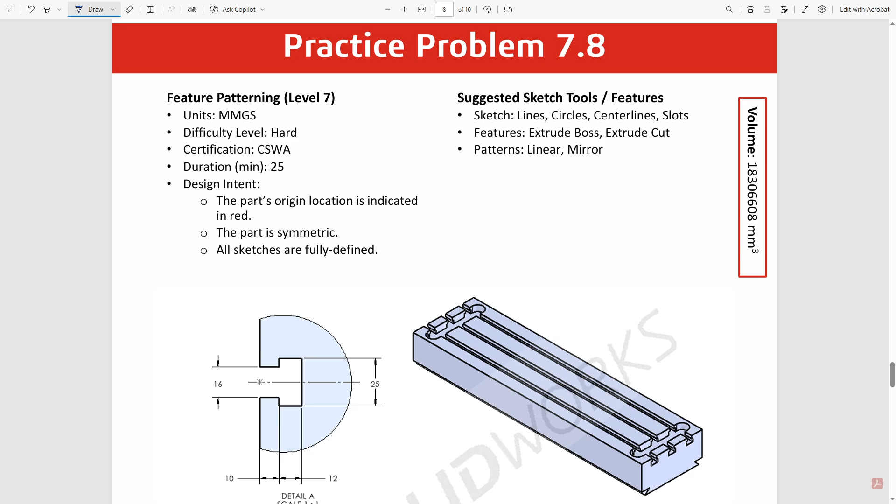I'm going to walk you through how I solved the CSWA practice problem 7.8. So for this problem, first I created the main rectangular prism and then started cutting things away, starting with these two little notches cut out, and then creating this little shape right here and cutting out its long track.

Then I used a linear pattern to create these two, and then finally created this slot right here, cut in a little bit, and then mirrored that feature to create the other cut for the other slot. So I'm going to start in the top plane and extrude down to create the rectangle. So let's get started here.

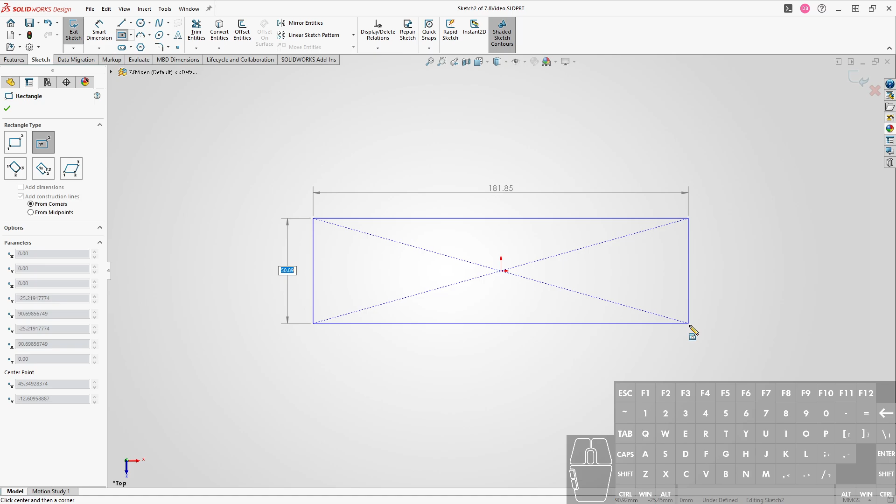So start in the top plane, and you can use Q for that. Top plane, sketch. Okay, and I'm going to use a center rectangle. Let me see here. So center rectangle with dimensions 225 and 850. And it's really big, so let me zoom out.

And as mentioned, we're going to extrude down, and the distance will be 90 plus 16 going down. The 90 plus 16 is coming from here and here, so that from the top to the bottom of that rectangular prism, it's going to be 106. Okay, so then we're going to work on these little notches right here and here.

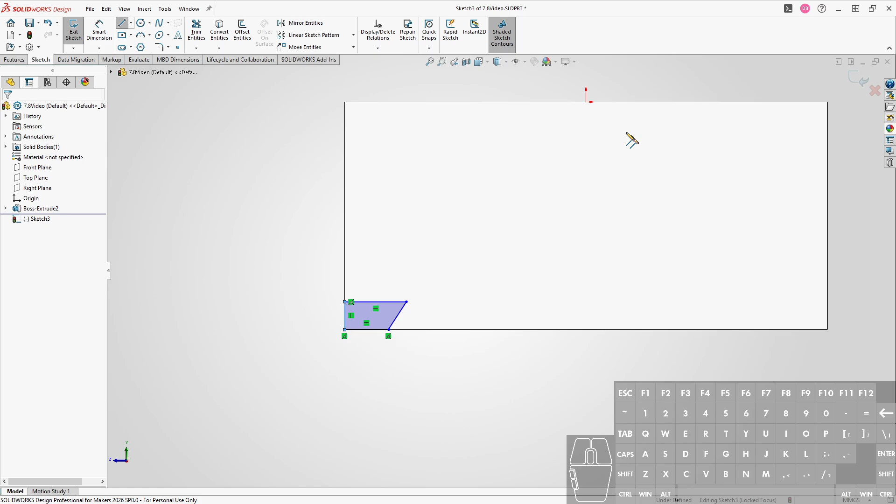So I'll create a sketch on this face, enter line mode, roughly do that little cutout profile. All right, and actually I'm going to create a center line for reference. We'll see why in just a moment. Okay, so it looks like the height of this little cutout is 16, and then this angle here is 45.

And then here's where we're going to have to use the center line. You can see that from the little tip right here to the other tip is 200. So if we dimension this tip, and then we can try to click on the center line, then that'll give you the distance from here to the center line, but if we move our mouse across the center line, it gives you the mirrored distance across. So we can click, hit enter 200, and there we go.

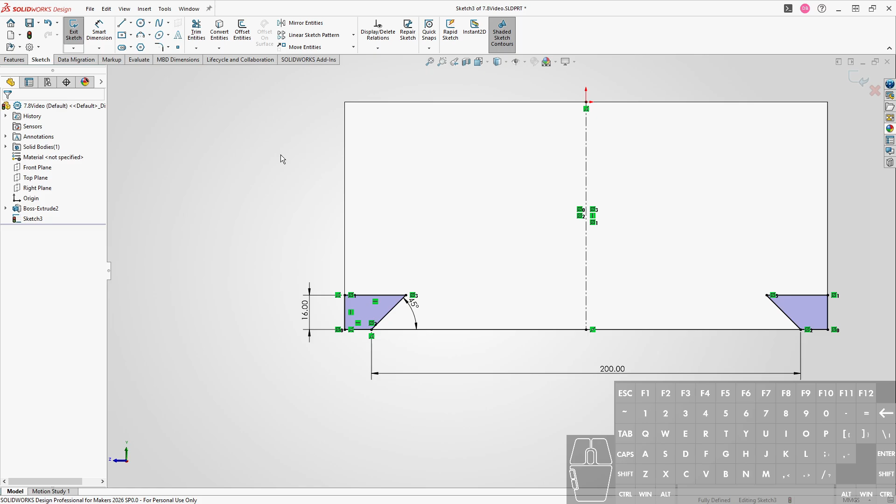And speaking of mirroring, let's go ahead and mirror this across the center line. So I selected the region, shift clicked on the center line, and then hit mirror entities, and then we've got the other little notch that we're going to cut out over on the other side. So let's go ahead and cut. We're going to right click and do a through all cut, and now those little notches have been cut out.

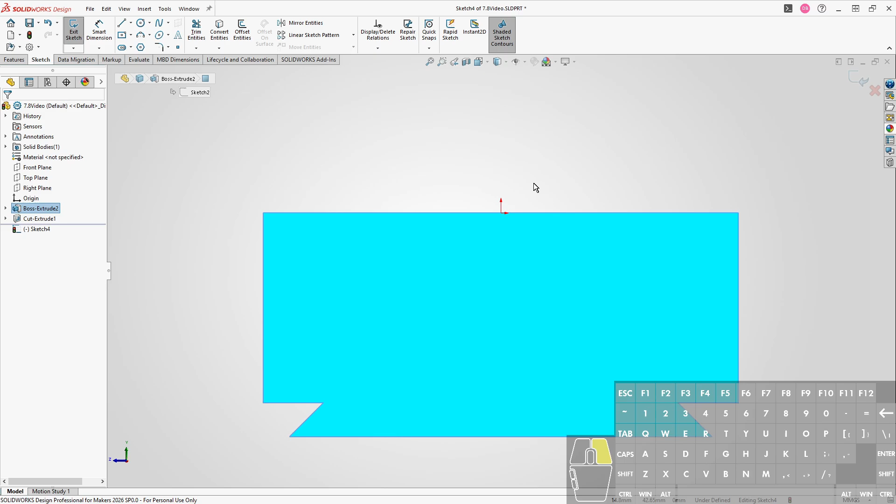Okay, so let's work on this guy right here. What I'll do is just create the general shape and then start working on making sure that it's symmetric about a center line that we're going to create. So in fact, let's go ahead and create that center line right now. And then start in line tool making roughly that shape.

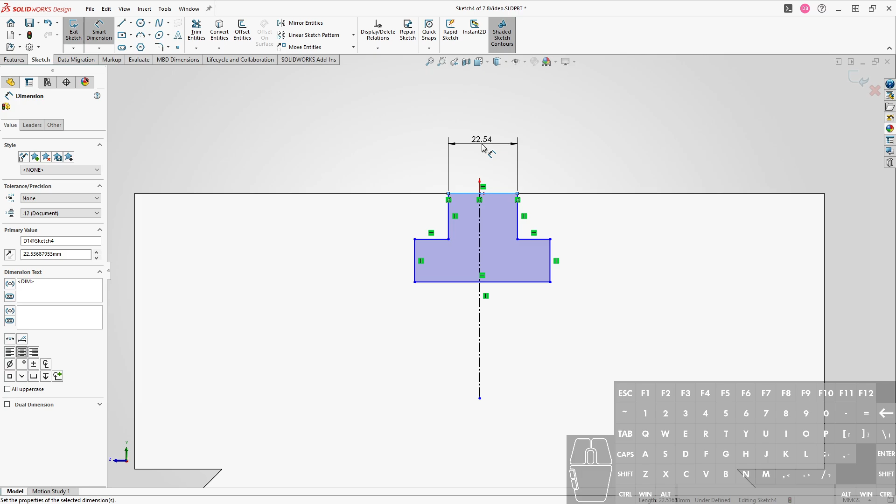And we can dimension this as we go, but I'm just going to go ahead and dimension it manually. So it looks like from here to here is 16, and from here to here is 25. Then we've got this guy is 10, this guy is 12. Okay, it's looking a little bit funny, but that's okay. So now we can start making it symmetric.

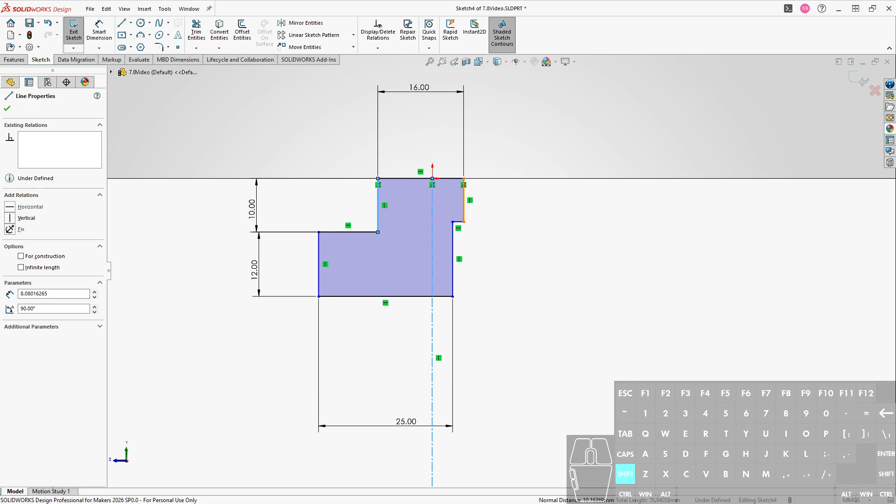So I'm going to click on this edge, and then shift click the center line and the other edge, and we can make them symmetric. Then do the same for these edges, these lines. Make symmetric. We can do it from the little pop-up right there.

Now one of the things is that this is dimensioned to be 10, but this is not. Basically we want it to be so that these two lines are collinear. So collinear is this one right here. All right, so now we're fully defined. That's one way of doing it. We could also just make sure that this line has a dimension of 10 as well.

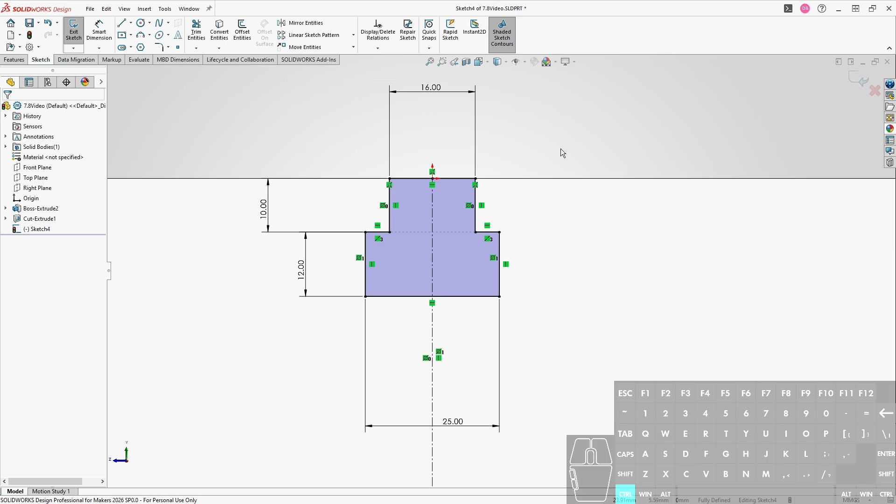All right, so now we've got the basic little shape that we want to then cut out. So let's go ahead and hit S, extruded cut. If you don't already have the S key shortcut set up, it's a good idea to maybe throw those in there. It's already set to through all, so we're going to hit enter.

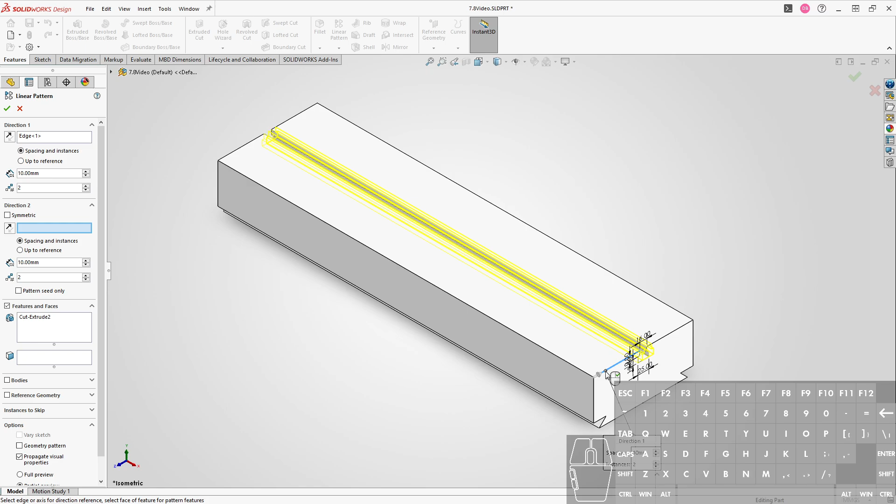And now we can take that feature and do a linear pattern on that feature. One direction, both directions will be along this line here, so we can select this line. We want them to be, it looks like, what is it, 65, switch over to here. Looks like from here to here it's going to be 65. So 65. We want two of them going in this direction, so 1, 2.

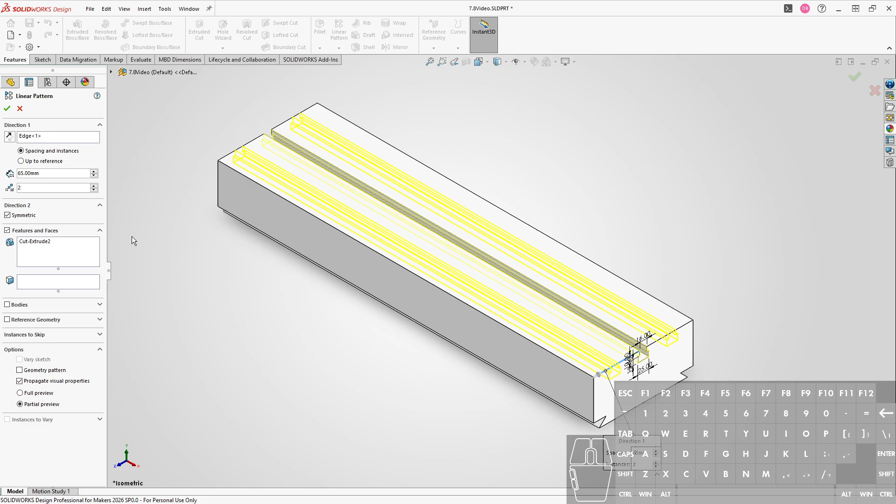And then in the other direction we want it to be symmetric. So basically we want it symmetric in both directions. So we can hit direction 2, symmetric, hit enter, and now we've got 3 of these.

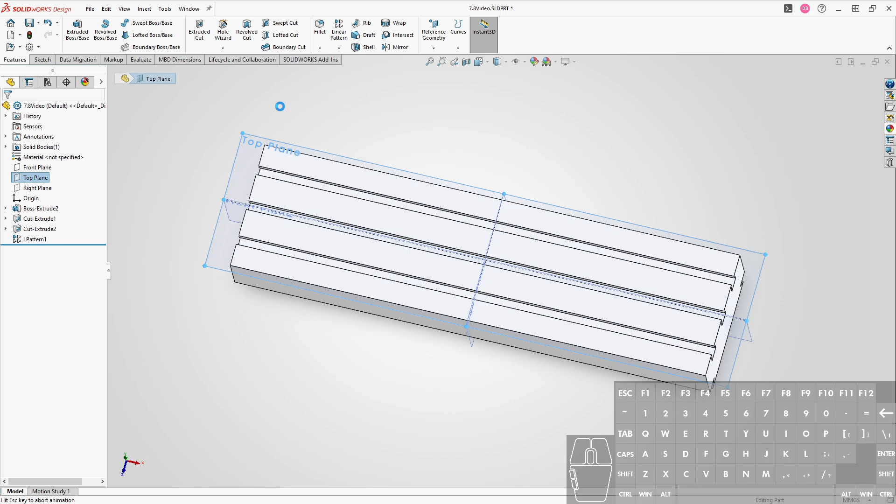All right, so the last thing to do is these 2 slots. And this one has all the dimensions on it, so I'm going to start drawing this slot and then just mirror to create the other slot. So let's work in the top plane for that. We'll go ahead and create a sketch in the top plane. And it'll be nice to have a center line to work with. So I'll just create a center line.

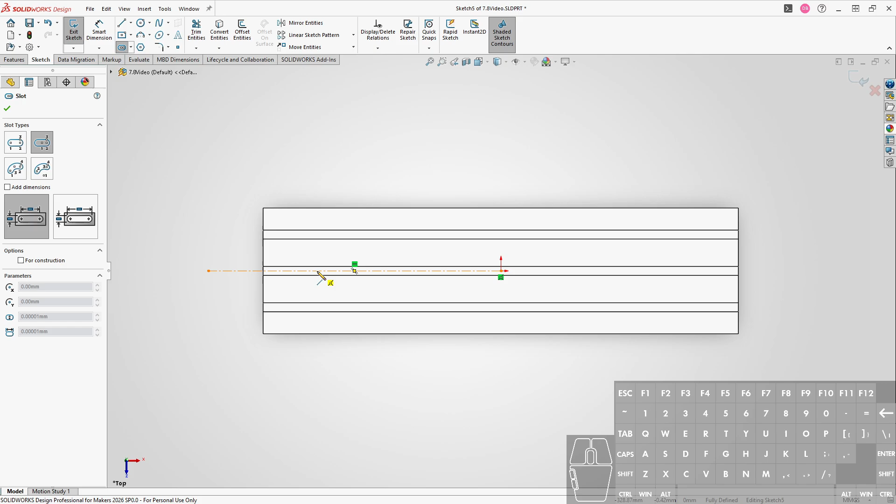And then the type of slot that's most convenient, I think, here is the center point straight slot. So we'll make sure that we're using that, where we can click on the center of the slot and then open it up. Make sure that this is vertical. It shows the yellow vertical, even though it doesn't look very vertical. So I'm going to click and hope that it's doing its job. Looks like it did. And then open it up, and now we've got a slot centered along this center line here. So let's start dimensioning it.

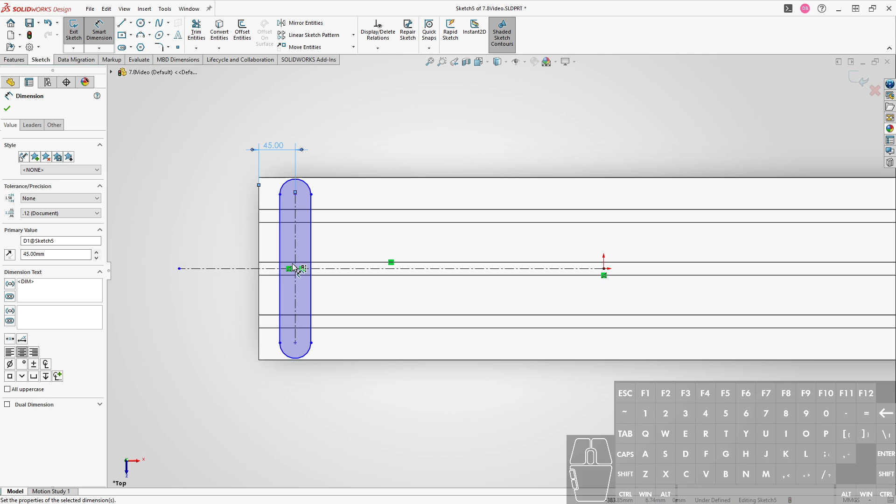Looks like from here to here is 45. And then this is 165 from the center to center. We've also got the horizontal distance here is 40. And great, looks like we're fully defined. So we can go ahead and cut. We're going to do a blind cut.

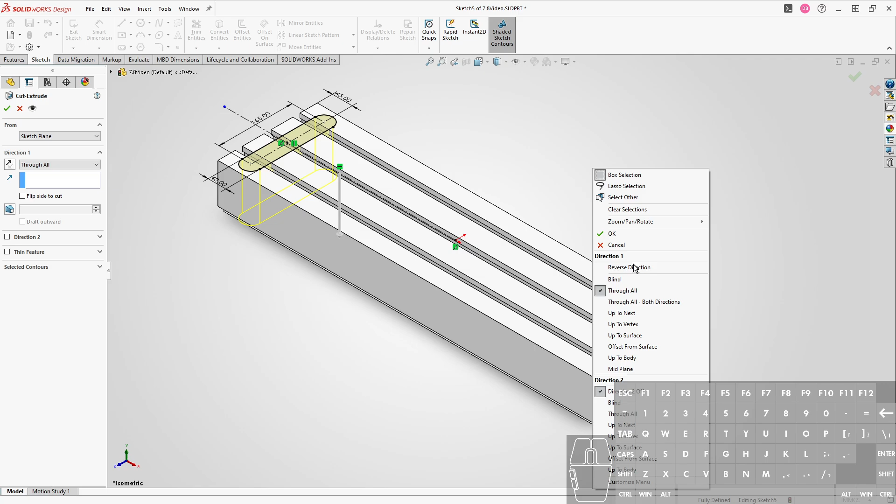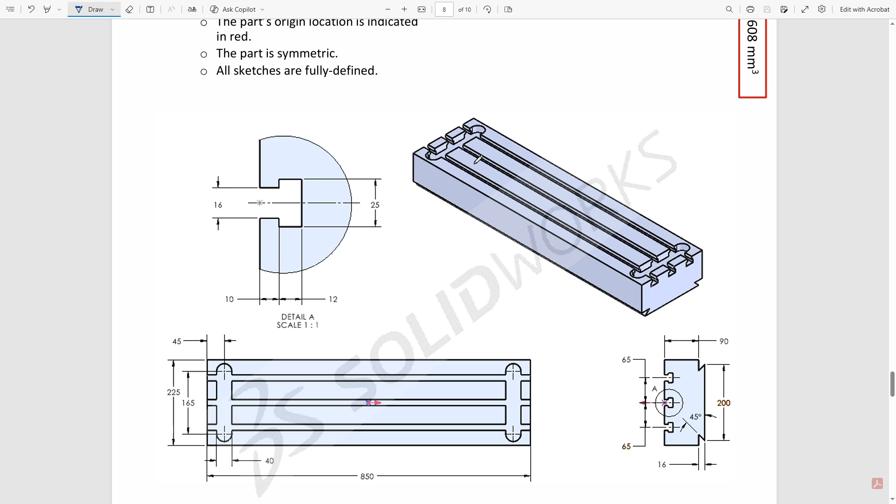And the depth of the blind cut will be, if we look over here, the same as the depth of the cuts for these guys here, which looks like 10 plus 12. 10 plus 12 from the top of the rectangular prism into this little cut right here. And so the slots should match, because it looks like there aren't any lines. It doesn't go deeper or isn't higher of a cut. So it's right flush up against the little long cuts. So let's go ahead and enter 10 plus 12.

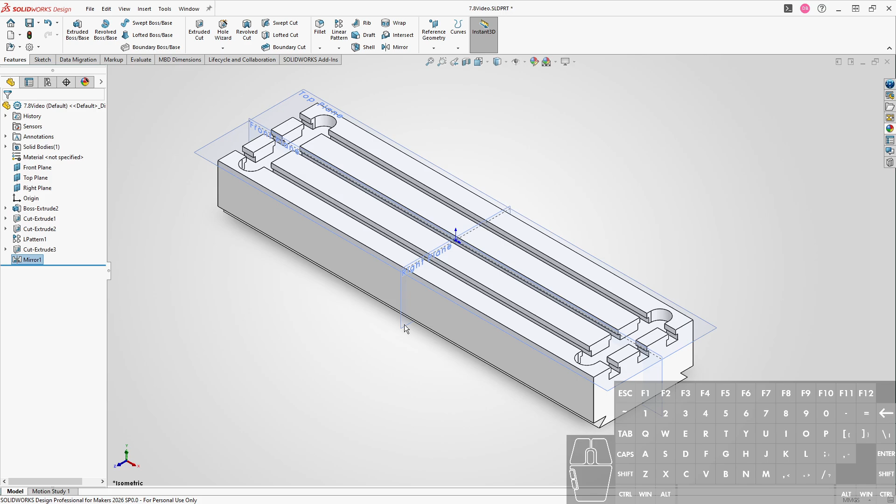All right, so we got that slot cut, and now we want to take that and mirror it about, and I can hit Q here actually, the right plane. There we go. Okay, so that's looking pretty good. Let's check. We have 1830608. 1830608 cubic millimeters. Looking good.